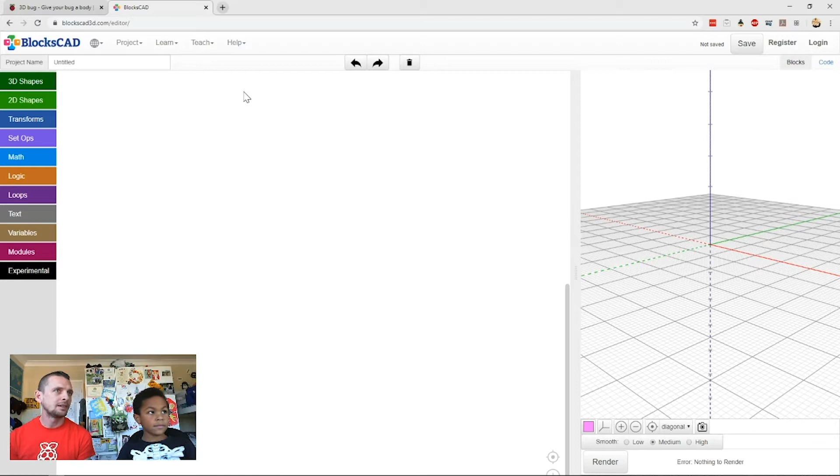You can see in the middle there's the workspace, which is where you drag all your code blocks, isn't it Zay? We clip them together just like Scratch. And do you want to show everybody where the rendering space is? It shows our picture - that's here. And we can see that's where it's going to start, in the middle, at a datum.

See that, yeah. So do you remember what the three axes are called, what the letters are that they have? What's the sideways one? It's the same letter as your name. X. And what's the up and down one? Y. And then the third dimension is Z. Very good.

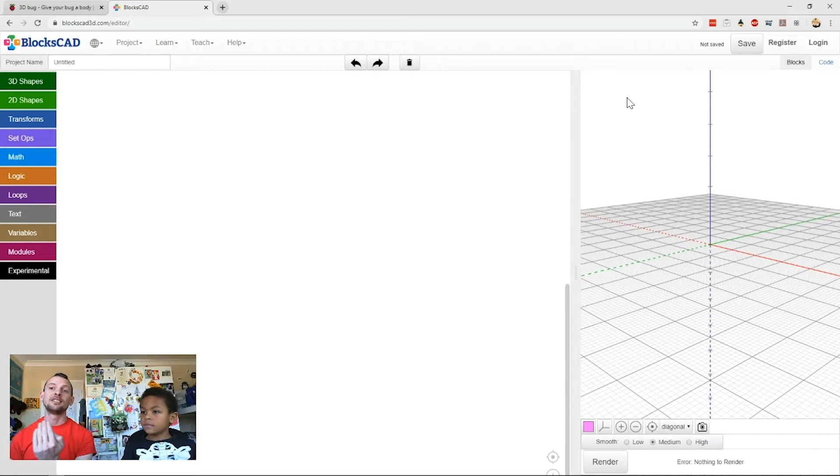And it took us a little while to get Z, didn't it? Because when we work in Scratch, we have X and we have Y, and when we work in 3D we have Z, which is depth. That's the ability for the shape to get bigger and smaller in that way. It goes flat all the way across for X, Y goes up, and Z goes forwards and backwards - that's depth. So we're going to be working with depth today.

So if you haven't done 3D geometry before at school, that's okay. If you follow the instructions, it'll give you a nice little primer on exactly what geometric shapes are. We're working with mostly spheres, which is what you get when you make a circle and take it out into 3 dimensions, and it becomes nice and round like a ball shape.

So to start with, Xavier, if you want to go back to the project site, let's have a look at our instructions. What do we need to do? Up a bit, where the tab is, that's it. So we need to start with what? Start with a sphere. A sphere, yep, with radius of? A radius of 10. Fantastic.

The unit here is millimeters. It's a tricky word, that one, right? So for the people at home, what that means is when you make a sphere in your project today and the radius is 10, that will be 10 millimeters in the real world. It will translate out to about a centimeter in the real world.

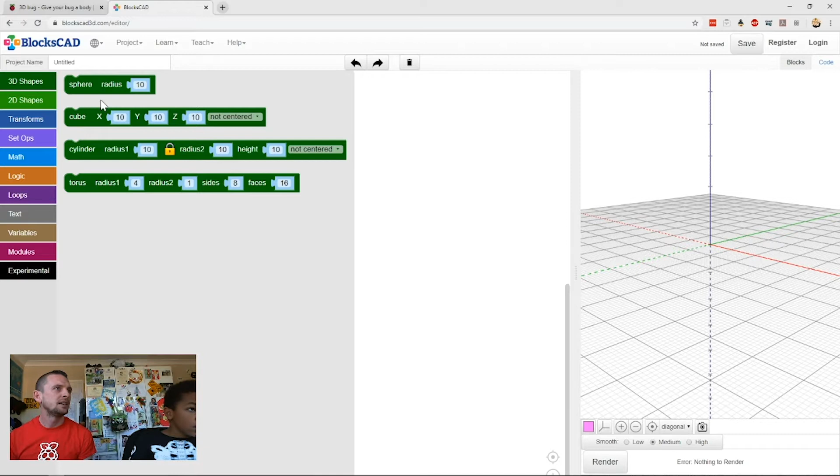So what we're going to do is click across, mate, and we're going to make our sphere with radius 10. So go back to BlocksCAD, that's it, and drag your 3D shape. And we want sphere with radius 10. So drag that in, that's the one, and Xavier just pop that in the workspace.

So how do we get everyone to see our picture, Xavier? What do we click to show the sphere? We make the sphere in our render space. What's the button that we have to click? Render, at the very bottom. That's it. So we click it, and it will make our sphere.

Fantastic. So we got a sphere there that's radius 10. Can you change the colour of it, Zay? Yeah, how do you do just that? Press the square. Yeah, it's the same colour. Cool, pick a new colour. Go on. And then you can go into any of these colours. Yep, like blue, red, any colour you want. Yeah, so what are you going to pick? I'll pick blue. Cool. And that makes our sphere blue.

It's just cosmetic. And remembering that when you 3D print the thing, colour - what will it mean when it 3D prints? What colour will it come out? Black. Or pink. Why? Because that's the only... it's not cardboard, it's black plastic.

So the filament that we have in our 3D printer - we're lucky enough to have a 3D printer here at home - the filament that we have is pink and black. So whatever colours you guys pick in your project, it won't come out on the 3D printer. But when you make those files in 3D, they'll keep the colour in the file. But 3D printing, it's down to whatever filament you have in your 3D printer.

So picking colours here... yeah, go ahead. Does it matter about the type of plastic you have? It does, that's a good question about 3D printing colour. So there's different kinds of plastic - PLA and ABS are the two most common ones. And we have PLA in our printer. And both of those, we have black PLA and we have pink PLA. So when we print out, you get to pick what colour out of those two. But when we're working in the project today, we can make it any kind of colour that we want and save that file. Yeah? Cool.

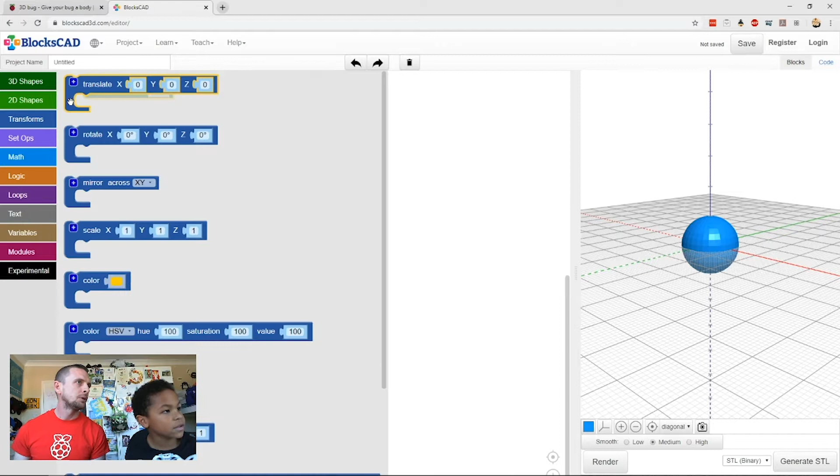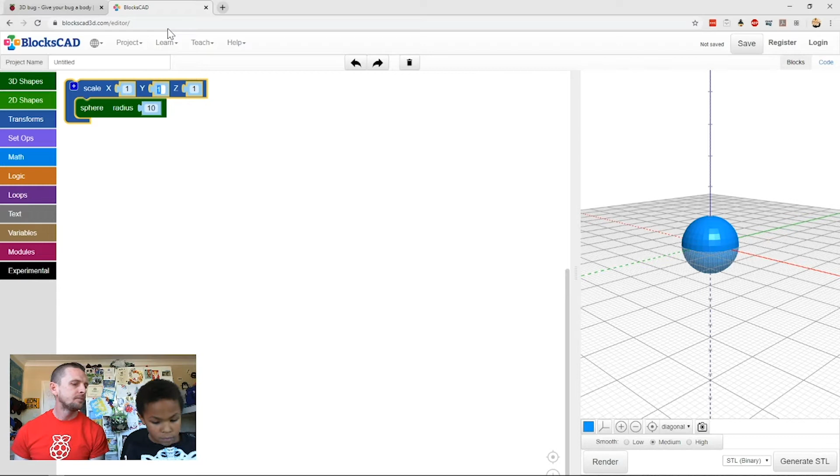That's how you know it's going to clip, isn't it? So in our Y, because we want to stretch it along the Y axis, we're going to take that Y number and click in the little block there, and make it 1.2.

Cool, and then when you click render, it will change your picture. It won't change automatically, you have to click render and then it works out what you want. And if you grab the picture and drag with the left mouse, you can move it around.

We can see that our sphere is slightly longer than it was before. It's a little bit oval-shaped. You can make it a bit longer if you want, but we'll leave it there for now, just to keep it simple.

So do you want to show everybody how you reset the view? What's the thing that you click to put it back so we can see? It's like a target there. You click it, and there we go, and it resets our view so that if we accidentally spin it upside down or get underneath and we want to go back to the way it was, we just click the target and it resets.

Like if you do like that, we can reset, just press that, and now going back to the middle. So let's go back to our instructions.

We can tick that one because we made our bug's body a little bit longer. Tick it, and then down a bit. So what we're going to do here is change another number in our Z axis, and that's going to take our shape and squish it down a little bit, isn't it?

It's not going to make it so round anymore, it's going to squish it a little bit flatter and make it more of like a domey bug shape. But it's not going to make it go flat like a table. You could do that though if you wanted to, right? Yeah, but that's not going to be 3D, it'll be flat, 2D, and it sort of defeats the purpose.

So let's go back and change our Z number in our transform. Just in the last block there, where it says Z at the end of your scale block, that's it. We want to change that to 0.8. That's it, and then re-render.

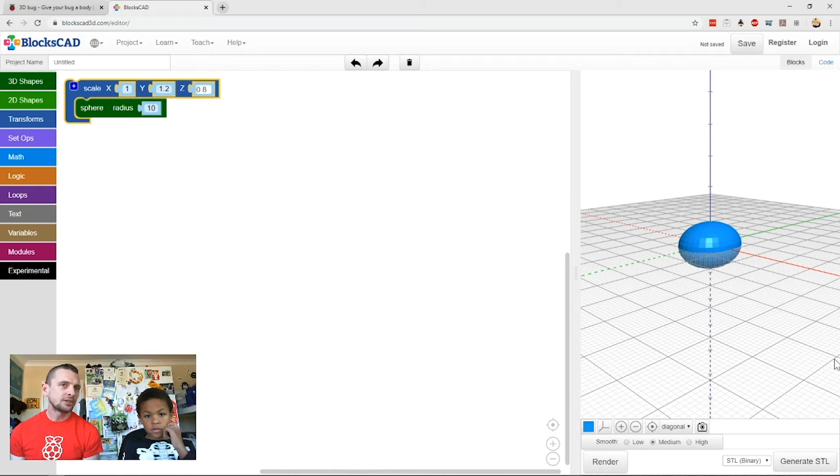Render, and there we go, and it flattened it out a bit, didn't it? Made it a bit more squat for us. So that's cool. Should we go back to our instructions and see what the next step is? Awesome, so give it a tick.

Yeah, and then flatten the base. So what this means is, when you do 3D printing, you need to have a nice flat bottom on the thing that you're printing, because if it's got a round spherical bottom, when you try to print it, the 3D printer will try and print that, and unless you make support for it, it will just wobble over. So we want to try and remove that and make the whole bottom of our thing nice and flat. We're going to cut it off where the 0 of our Z-axis is.

If you go back, quick, you can see, if you move down, there's another one. All we're gonna do is not cut the whole thing, like the top. We're gonna cut on the line, which is right just there. We're gonna cut the bottom half off, aren't we? So it's nice and flat. It's gonna be like a half shape.

Cool, so let's go back to our instructions and have a look at what we need to add. So what's our next block? We're gonna make... what shape is that, Xavier? What shape is that, this one? Yeah, the yellow shape, oh, this one.

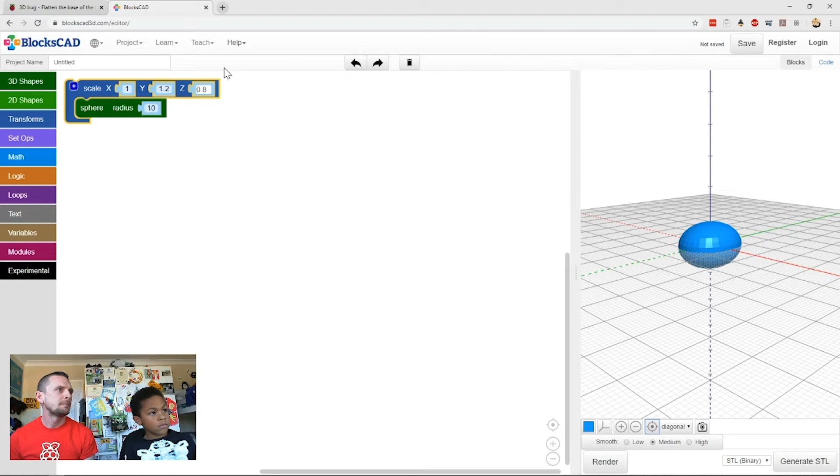Yeah, it's a cube. So we're going to go back and grab a cube block from our 3D shapes. See the one that says cube? That's it. Drag it in.

Pop it down in the middle of your workspace, anywhere it goes, that's fine. Okay, let's go back to our instructions and see what else we need to add. We need a translate block. When we're working in 3D, we can do things like rotate and translate. Translate means you take your shape and move it around, up, down, left, right, forwards, backwards.

Like on your keyboard, it's there, you can do all them. Yep, and movements, but you don't use these. No, but it's the same thing, right? It's what you do when you have a game. We're translating that shape, so we're moving it around.

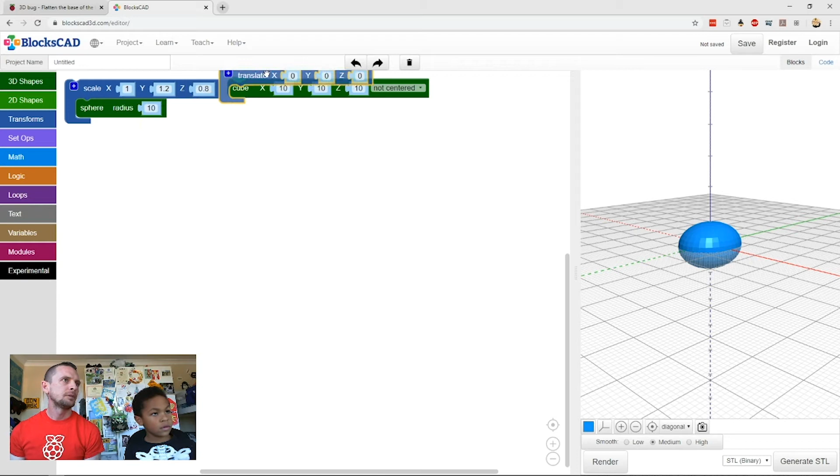So let's grab a translate block and clip it. That's our transforms, let's clip it around our cube. See at the top, fantastic. So let's move them apart a bit to make them a little bit neater, so people can see that they're not linked up.

Cool, and so we're going to make that cube - we haven't rendered it yet, which is why our cube hasn't appeared. We'll do that in a minute, not just yet. So we're going to translate it, and we want to take that cube and drop it down in our z-axis. So we want to put -5 in our z square.

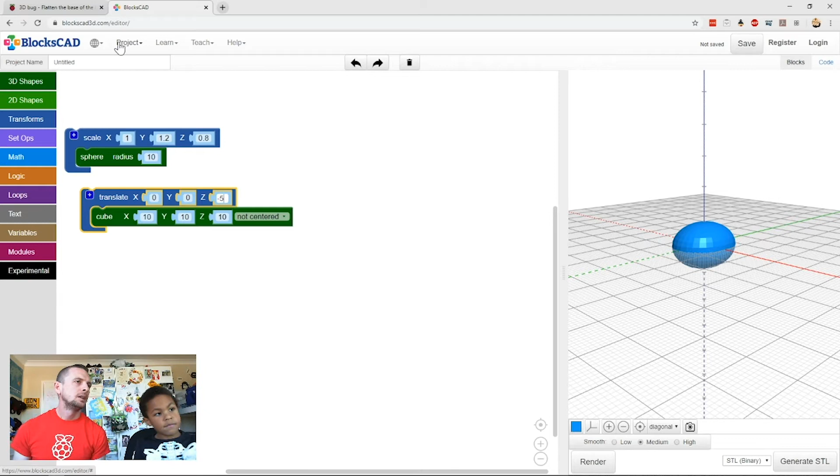-5, cool. And then let's go back because we want to add, go to transforms, and we want to add colour. So pick a colour one and we'll just leave it as yellow for now because that's the way it is in the instructions, the fifth one. Clip it around your cube block, the one we just made, around the whole thing.

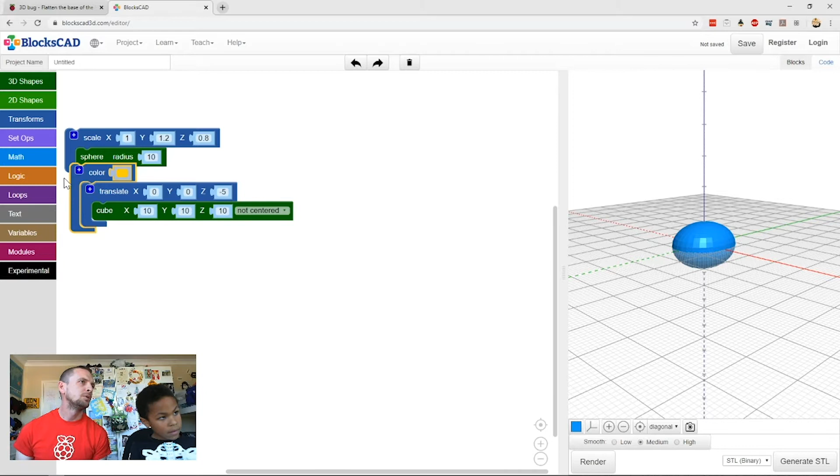Okay, so move them apart again so they're nice and neat. Fantastic. And so now when we click render, we'll get our sphere that we've already made, and we'll also have it render a new cube for us that's yellow. Oh, but it's not quite right, is it? It looks a bit wonky.

Yeah, it's just in there, not really right. So let's go back at our instructions and have a look at what numbers we need to pop in there. We want -5, but what we want with our cube is we want it to be 50, 50, and 10. And the important thing, the last thing, that drop-down menu that says centered, we need to make sure it's centered, not that the corner is at 0,0,0 - we want the center of our cube to be at 0,0,0.

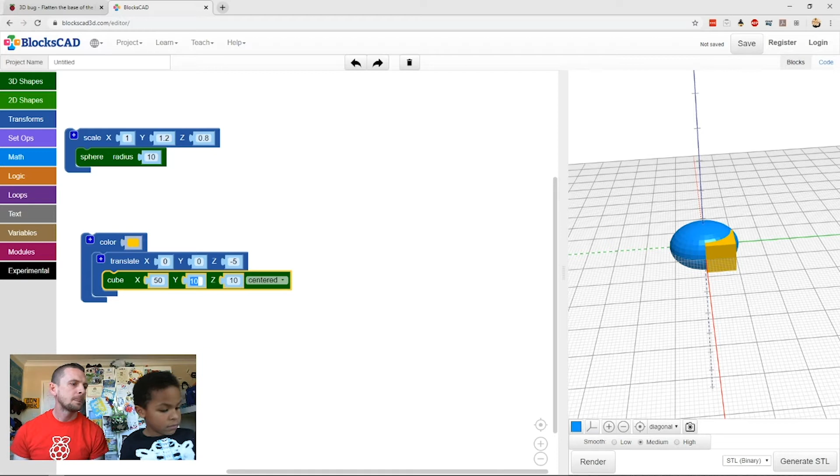There we go, fantastic. And we want to change those to 50 and 50. Just leave that on there - that's right, we do, we want to leave that. So 50 and 50. Great, and just leave it. Yep, and then when we render, what happens when we render? It's going to get bigger.

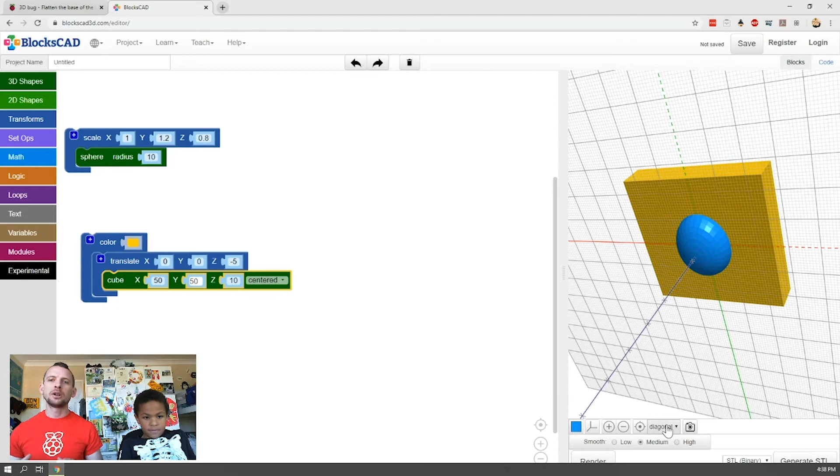There we go. And so now if you move it around, Xavier, you can see that we've got a big cube, which is fine. The enormous cube is fine - we're about to turn that cube into a big eraser that will remove everything that's inside it. So we want it to be as big as possible. That's absolutely fine, it will cover all the parts of the bug that we might need to make in the future. So let's go back to our instructions and work out how to do that, Xavier.

Do you remember? Okay, so click the tick because we've made our cube and it looks like that. That's fantastic, let's go down a bit. If we want a difference block, what colour is our difference block? It's purple, and that's our set ops, so our set operations - under the normal one? No, it's under set operations. Click that one. Yeah, and we want difference, so that's a minus. You'll see it also tells you plus and minus in the block.

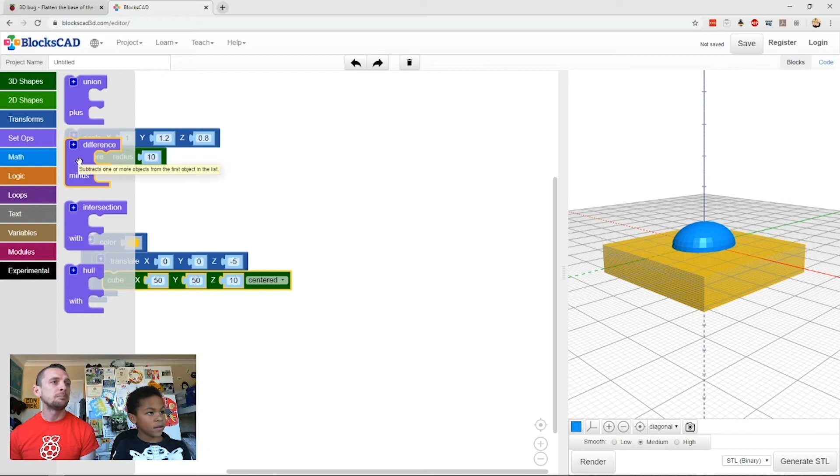So we want a minus, to have everything minus what's inside that cube. Let's pop our scale one in the top, and pop our sphere in the top hole. Move that over to the middle of the table and drag it in. That's much easier to do. Drag your one into the top hole, and the other one into the bottom hole. So what that will do is, before we click render, let's explain what we've done.

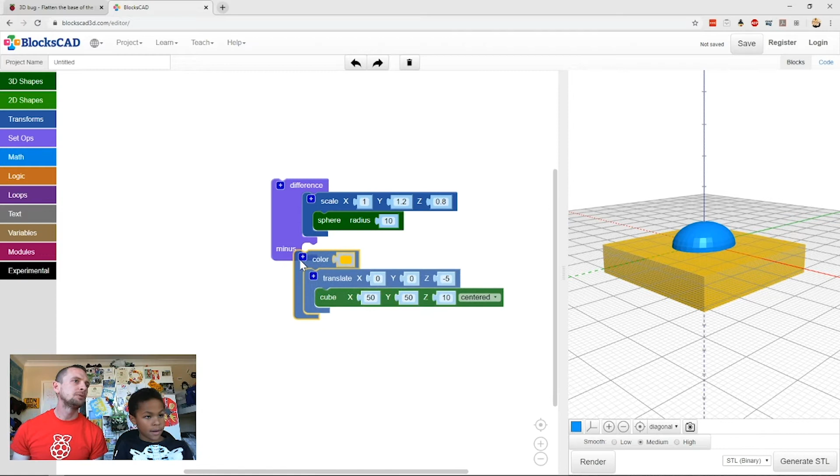So we're going to draw our sphere, and it's going to be minus everything that's inside where that cube appears. If you render it now, Xavier, render our shape, and it's all gone. The only thing we have left is the bit of sphere that isn't inside the cube, and that's exactly what we want. This is going to be the bug's body.

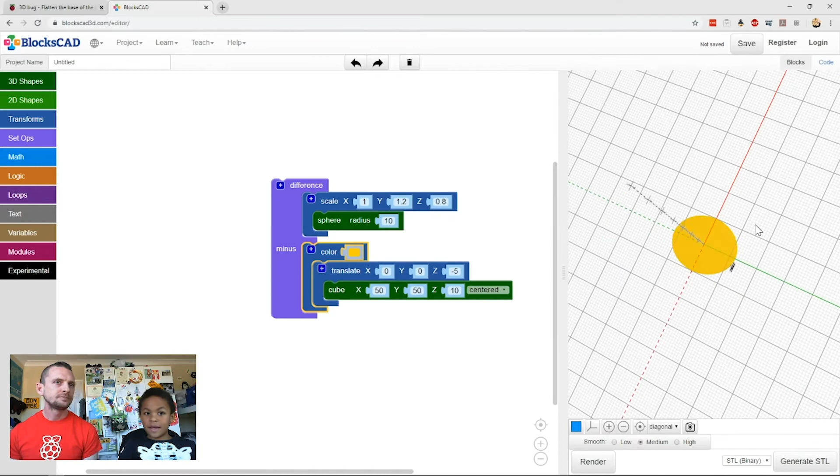Awesome. Do you want to move it around, show everybody what your bug's body looks like? At the right, so it's all gone from underneath, at the 0 point. It's a different colour, but don't worry about that, because it's just going to come out the same colour, the whole thing. That's right, and there's our bug's body. So let's reset our view. It's going to be exactly the same. Pop, there we go, and we go back to our instructions now.

We're well on our way to making a bug. So we can click the tick there, and say add our head to the bug. So what shape is the bug's body? Kind of a... what's the name for that shape? The ball shape, we've been saying it a lot. Sphere, very good. So what shape will its head be? It's the same. Same, right? Same, sphere. So here we go.

Okay, so you'll see that where we've got that sphere will be exactly the same as the sphere that we've already produced, and we don't really want that. We want to have a smaller sphere. So let's change the radius number, Xavier. Let's change that radius number down to 6.

Okay, and so while Xavier's doing that, I'll explain to you: when we work with shapes, if you have a circle, the radius is the point from the middle of the circle out to the edge of that circle. And with a sphere, the radius is the point from the dead center of the ball out to the edge of the ball. So we're going to have our body with a radius of 10 - from the middle to the edge is 10 millimeters - and another one where from the middle to the edge is 6 millimeters.

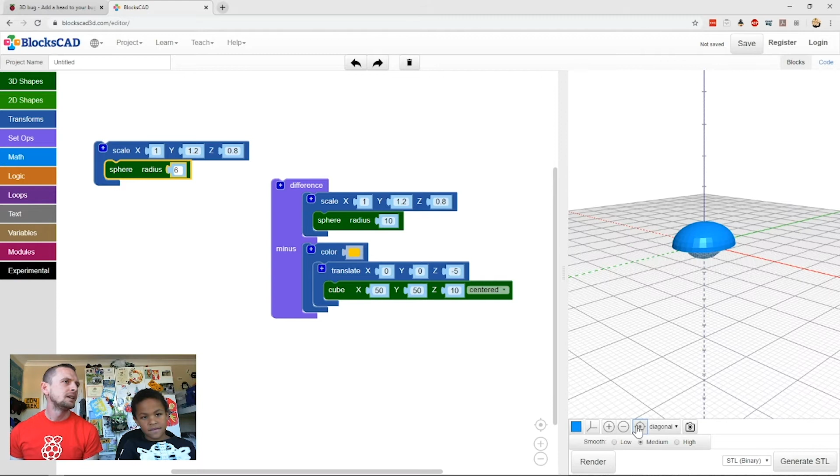So let's reset our view again. Let's hit the target, there we go. And so what we need to do now is go to set ops, Xavier, and choose union - the purple menu and union, that's the top one. So this is a plus.

So what we want to do here is when we have union, we're going to take this and smoosh them together, right? We want to make them one big piece. And so we're going to grab our sphere with radius 10. Sphere? Yep, the one that we made inside our difference block.

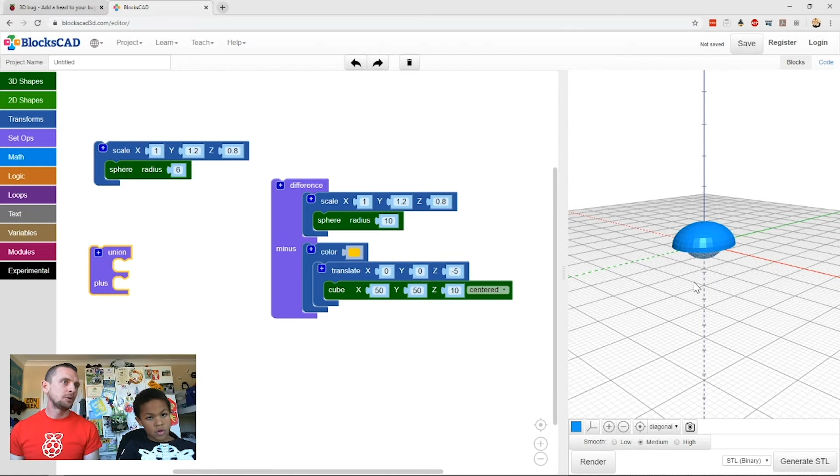Grab it and drag it into the bottom hole of our union. Then we click the new block that we made into the top hole. The scale block, up the top there, drag that one into the top. And then we put the whole union block inside the top hole of our difference block.

Okay, so before we render... it might look like it'll be smushed, but it's just going to have another space. So before we render, let's explain to everybody what we're doing, okay?

So what we have now is... can I tell them something? Yeah, do it quickly. If you press plus, there's going to be extra space. Yeah, but we don't need that right now, do we? So click the minus. That's a good point, but let's do that when it's relevant, yeah? Just throwing information in will confuse people. It's good that you know how to drive it, man, but let's run through the instructions briefly, yeah?

Okay, cool. So what we're going to do now is if we click render, it's going to join those two spheres together for us, just like this, and it will chop the bottom off them because they're all inside that difference now. So you can see that it's got make a sphere, and then remove all the cube underneath.

Now, why can't we see the head? Because it's inside the bottom. Right, so what do we need to do with it? We need to... translate? Yeah, yeah, we want to move it.

So let's go back to our instructions and have a look. We can click that tick because we've got the sphere inside another sphere. So what we need to do is, if you go down—okay, that one just tells you so you can remove the body. If you right click on the body block, you can disable the block so it doesn't work and it will just show you the head. But we're going to skip that part. At the end, the head will look like that.

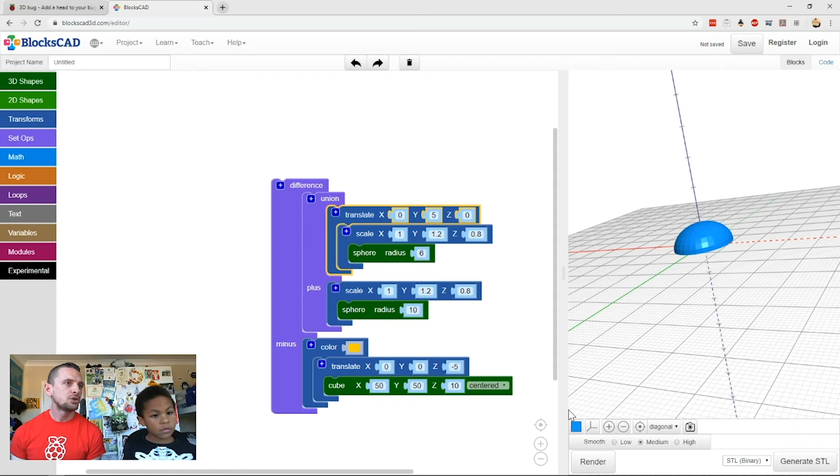That's it, let go. Yeah. And now when we render, it should take the head out, make us a little head that sticks out. Let's have a look around. Where is it? Oh, it's not quite there yet.

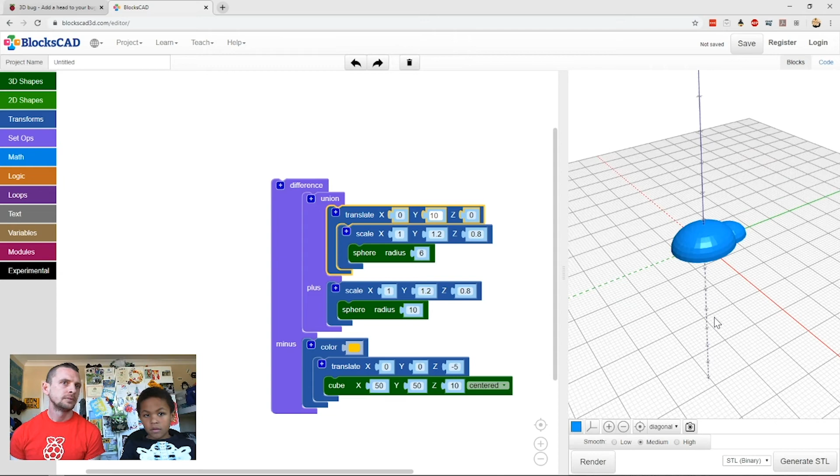Interesting, so maybe what we need to do is add a bit more to the Y. Let's see if we can make that Y number a little bit bigger and see if the head appears. So that middle number of Y, click in there—you could just do 10, try it. But sometimes it can go out of the body. There it is, that's pretty cool.

You can make it a bit wider, but I wouldn't say— well, you can do that if you want, man. Scale it along the x-axis if you want to make it fatter. Just change that next one down—that's translate, you want to scale it. Scale means that you're changing it along one direction, making it fatter or narrower along one direction. And the x-axis is the one you want to change.

Can you make the head a bit fatter? If you want. Yeah, go on then. Change it, scale it. You want to scale both of your spheres along the x. So you've got it selected already. If you make that number slightly bigger, 1 point something—yep, the one you've already got selected. So you want it to be 1 point... hang on a sec, look, you've written over the top of the number 1 there. Yeah, so 1 point.

Sure, I don't know. So now render it again, and you'll see it will change the fatness of his head for us. Well, that's a pretty fat head.

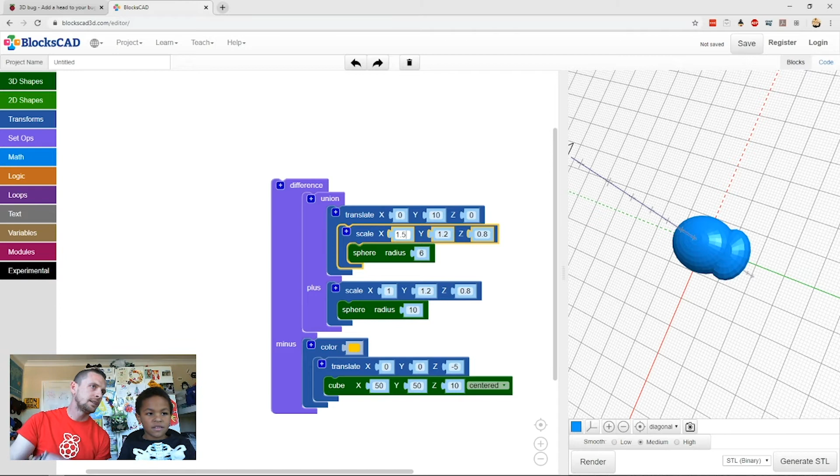The body is the next one down. So if we scale the next one down, we can change it. Down here, next one down, that's it, where it says scale X. You can make that fatter now too, so 1 point something.

I don't want to make the head bigger, we'll change it back in a minute. You want to make the body fatter? Go on then, put it in. 1 point something, no, point something will make it smaller. 1.4. Cool.

Did you want to make the head smaller, or are you happy with that now? Smaller, okay. So change the scale there, 1 point something smaller, maybe like 1.2. Yeah, and then render.

That better? Yeah. You digging that? Awesome. But can you make it like that, like thin and...

Just scale it up along the y-axis. But remember, the more we play with the numbers, the more we're going to have to think about the maths later. So it might be a good idea just for these purposes. We can play with ours all we want later, but let's just leave this one simple for the people at home. Okay, so let's go back to our instructions.

Cool, so you can click that tick now because we've translated our head out of the body, all right? So we moved it along the y-axis, we slid it along the y-axis, which is translate.

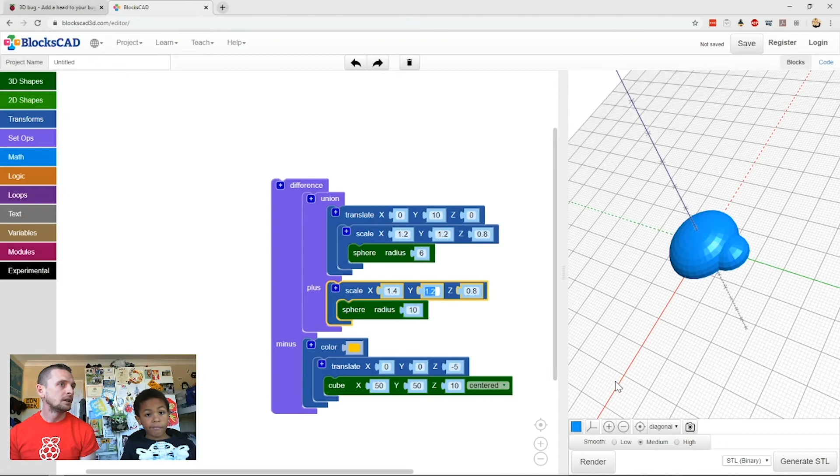So now we can go back and change the colour of our head, can't we, to start making it look cool? Reminding everybody, grab your colour block, which is in transforms, and you can grab that colour block right there. Clip it around the head one, which is the top block there. Up, up, up, yeah, that's it, let go. Then grab your other one and clip it back in. That's it, let go, cool.

So now change that colour of the head to something else, like red or blue or black. It gives you a whole list. Anything will do, man. Don't spend too much time picking a colour for right now, just pick...

Guess I'll choose... cool, and then re-render. And we should see the head change colour so we can detect that they're different parts. Pow, awesome, looking good. Good, man.

Let's head back to our instructions. Excellent, we can tick that next box too, since we've played with that. And remember, everybody, when you 3D print it, the colours we have in BlocksCAD won't necessarily translate to your 3D printer, unless you have a really fancy 3D printer with multiple filament heads. But ours, we have to choose before we start, and put the right colour plastic in.

So the next thing we want to do is, it gives you a challenge here so you can change the colour of your bug body model. You just do that the same way we changed the head colour, grab your colour block, drag it in, click go.

So let's click create legs. This is the next part we want to do, we want to try and create some legs. Now I'm getting really close to finishing it. Yeah, we're nearly close, right? This is really good, you guys zipped through it this time.

So we need to now make a pair of legs in the bug's body. The way we're going to do that is by making another sphere and stretching this one out big and narrow. So instead of having a nice round one, we're going to make it go like this and it's going to look like a pair of legs. Yeah, so let's do that now.

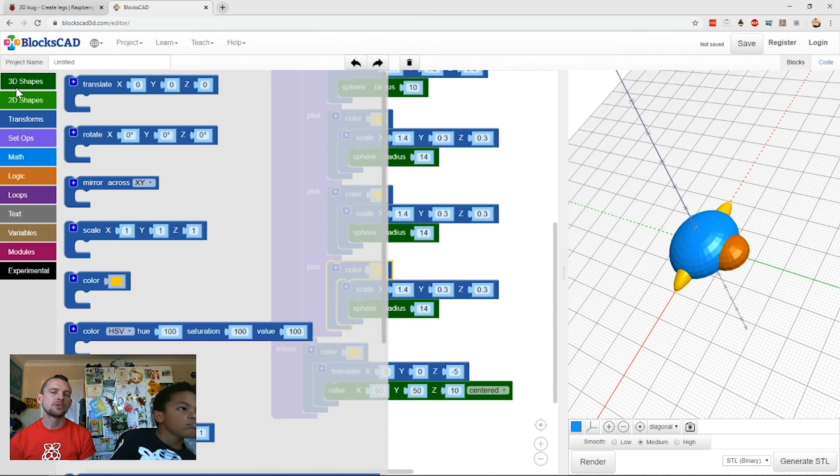And this one, we want rotate. So translate is move it around, rotate is spin it on the spot. Okay, so we're going to grab a rotate block and pop it in our workspace.

Cool. Grab your second colour yellow block, the one in the middle, next one up - that's it. Drag it into the rotate, and pop that back in - the whole thing. That's it, the whole thing.

There. And then you can do that again with another rotate block. So just get one. Yeah, rotate, and then put your colour block in. Here, yep, and drag the whole thing back in.

And then what we want to do is change our rotate. So in your first one, in the middle there where it says up a bit - up a bit, yep. So in this block here, we want to change that number to 30.

You'll see the little angular indicator show you what 30 degrees looks like - that's how much we're going to twist our legs by. For the next one, make it 30, click. Excellent, 30 degrees.

Down a bit, we're in the rotate block, which is 0 degrees. We want to change that one. You could put minus 30, because we want it to turn 30 degrees the other way. Or you could say 360 minus 30 is 330 degrees, but we're lazy, so let's put in minus 30.

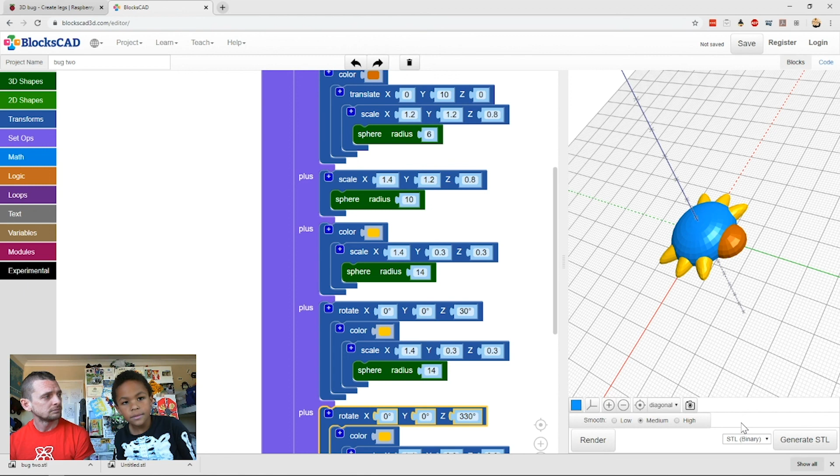When you make the bug, the legs and the body, you can make it really long. When you make the body a bit fatter and rounder, it'll 3D print it big and round.

Yeah, so we can scale it, can't we? We make our file here, and once you get it on the 3D printer, you can scale it up and down again. So however big it comes out - if you've made it too big by accident and don't want to use all that plastic, or mum or dad says you can't use that much filament - you can scale it down inside the 3D printer and print it nice and small.

Good work, dude, that's some complicated maths for a little dude. Yep, but yeah, I got it still. You sure? You did get it. Do you understand a bit more about geometry and stuff now, how 3D shapes and things work? Yeah. That's good, man.

That's complex - I learned 2D before, flat like the table and paper. 3D is round, like a Pokemon ball. If you even like Pokemon, nice. Should we make some Pokemon balls for the 3D printer? Yeah, all right, let's do that later, eh?